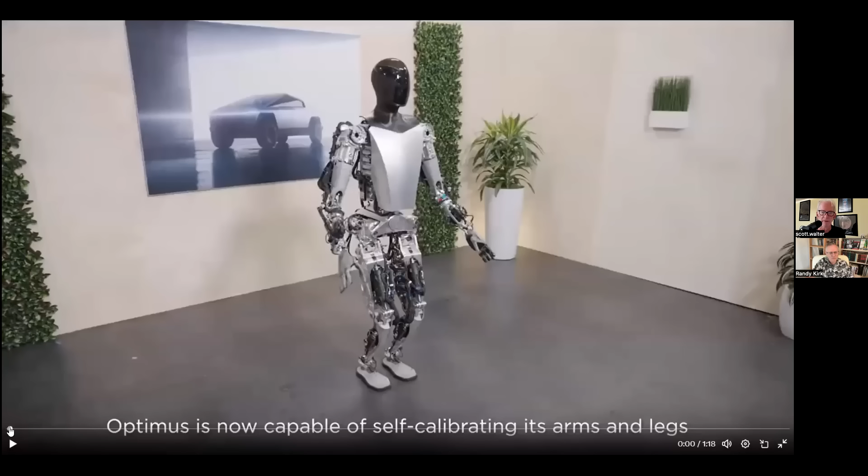Do you want to start with an overview of your thoughts, or do you want to put the video up and take a look at the details? We're going to break it down. So it seems to me there are maybe 3 really major things that are going on here.

Was there anything that stuck out to you right away that you'd like to comment on? This business that we have as humans where we can touch our nose with our eyes closed, there's a name for that. Proprioception. Yeah, okay, proprioception.

Is that what they're talking about with regard to those dots on the arms? Yes. Basically what they're doing is a calibration so that you dial in the proprioception to be accurate. You want to make sure that whatever the internal model is that Optimus has matches the control output model. So when Optimus is moving the joints...

It's said in the tweet, but not actually in here, the header to the tweet was video in, control out. So it's seeing something, and it says, now I need to move my arm somewhere. So the neural net is doing something to say that the joint angles must be a certain amount.

And joint angles are basically measured in encoder pulses, so that's why they're called encoders. So the first thing to do is make sure that all the Optimi are calibrated to the same reference datum, or the same zero.

So the thing about it, if you look at my elbow, have my elbow out straight. If I bend my elbow, I want to know what that angle is that's measured. So what you do is you put an encoder there at the joint to measure it.

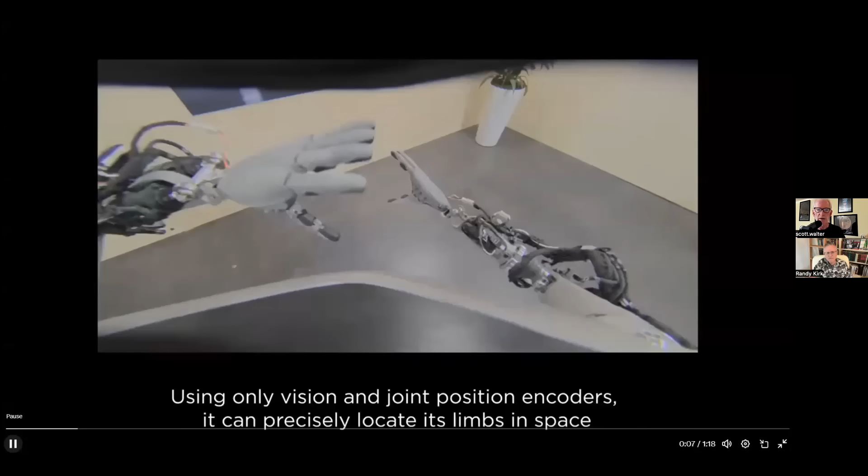They're trying to survey some landmark features on your mechanism, and cameras are really, really good at doing that now—like iPhones and everything else are already able to pick up landmark features. So what we end up seeing here is when it starts to move around, it's probably doing these specific moves intentionally to figure out some of the joint angles, and then we could see what it sees. When it's looking down there, you'll see there's no dots on there, but if you look at the hands, you're going to see creases in there—points in the knuckles, some ends over here on the wrist, and a few other places that may be really good landmark features that it can recognize and pick up.

So at some point the system goes, yeah, I see those. And remember, Optimus has multiple cameras—it's like us, it has stereo vision, but actually a bit more because it has several others. Because it has stereo vision, it's seeing both those a little bit differently in those two images, and you can match those images up and triangulate to figure out what the actual distance is. So that's a very, very common thing that will be done to measure it.

Now, there's an important step before that. First, you have to calibrate the cameras, because in order for us to figure out what the stereo field of view is, we have to know the exact distance of our eyes, how far they're apart. And so you're hoping all the Optimi are manufactured the same, but it's possible the camera is popped in not quite right.

So we do the same thing with FSD. Remember when you first get it, you have to calibrate the cameras, you have to drive around a while. So there's an auto way to do this, first you calibrate the cameras. Now that the cameras are actually seeing everything accurately, you go in there and survey where those different landmark features are. You try to oversample, because the more you get, the better it's going to be, since any one individual measurement is going to be a little bit noisy.

But when you have a lot of them, the noise basically comes out in the wash, and now you know exactly where it is and can dial it in. So it might be one of those things where every time they turn off Optimus, it's like when you wake up in the morning, bleary-eyed, your proprioception is really bad, like when you go to yawn and your hand goes like this. So it may be that when it wakes up, it goes through a very simple routine to recalibrate. This is very fundamental to robotics in general.

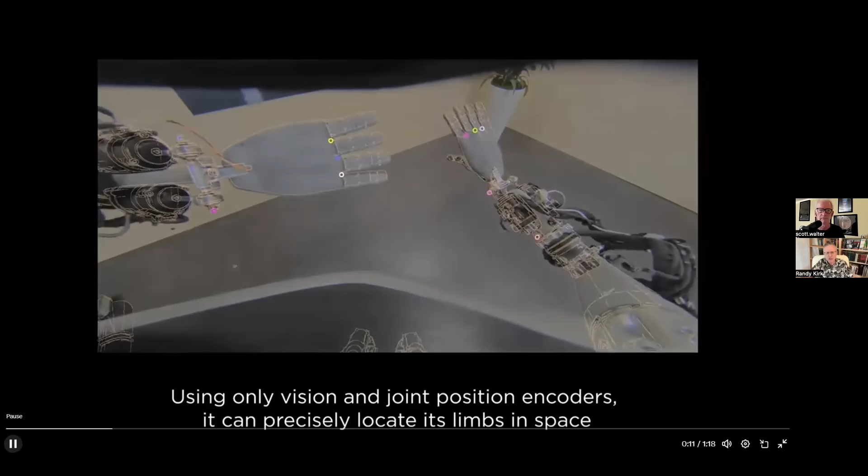Okay, now the second thing that came to mind, only after I heard you this morning on Herbert, and I'm looking at it right now, is all the wiring that still is exposed. Yes, you mentioned that on the video this morning. And so there still seems to be quite a bit.

And remember, this is still a prototype. We can actually see a lot of the covers are off and everything else, so we really don't know how many of these are needed cables versus how many are just there for debugging the whole process. I suspect eventually they're going to go there, and I'm hoping they're able to find some way to route these things. They probably are, but it's just low priority at this point.

The other thing to remember is that here it's using vision and joint position encoders, so it can precisely locate its limbs in space. It knows exactly where they are. And limbs mean legs as well, so somehow it has to look down on its legs. I'm not sure whether it does that from a standing position, or whether it sits down, or whether it's balancing on one foot, because it's going to have to get its leg out there in the field of view for that to work right.

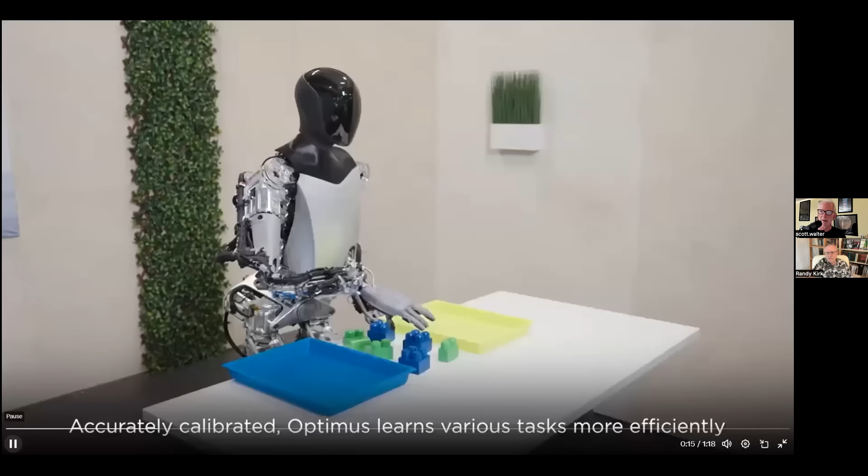Okay, so that's what we have here, I think, on that. And then we get to the next part, which is now that it knows where it is, it can actually grab the parts because it knows what it wants to get. So it's the vision in, and now whatever the control out is will match the model correctly. Otherwise, if it was way off, it would probably miss the target every single time. So now it's able to learn it, and it'll probably be easier to transfer from one Optimus to the next.

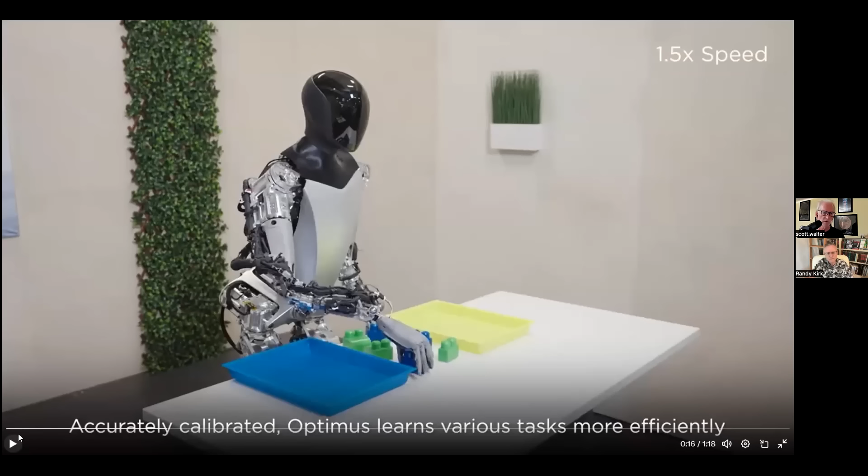And we can see it's picking up what looks like Mega Bloks or something like that, to move them into different positions. A very simple step. We saw Google doing something like this about a month or so ago, showing how they can pick up parts and move them around, like putting apples in the apple bowl and oranges in the orange bowl. This is a similar thing, they're probably giving it a very simple instruction, put the matching colors together.

And it's interesting, this looks more like yellow to me than green, but it may be that the blue belongs there, and this is kind of the best next thing. Or maybe it's colorblind, I don't know.

It's been noticed that when it grasps something, the other fingers kind of close too. It may be that from the standpoint of grasping, it doesn't quite know yet that you only need 3 fingers and can leave the others out. It's probably just closing them for good measure. But it actually looks very natural, because if you try clenching your hand and then just using the thumb and first two fingers while keeping the others out, it's kind of hard to do. The other fingers just want to come along.

Optimus can actually hold those fingers up there because they're independently driven. As you move one, it's not going to force the other finger to move. So it's just saying, go ahead and clamp it down, because maybe we're not exactly sure of the size of the object, but that's okay. That's what it's going to do for a grasp.

But also, if it's watching a human, if it's watching a video, this is video in, and the human is doing the same thing. The human is not going to have the fingers out there. Maybe you don't want that, because now the fingers are exposed and might get caught on something. So maybe the idea is to get them out of the way.

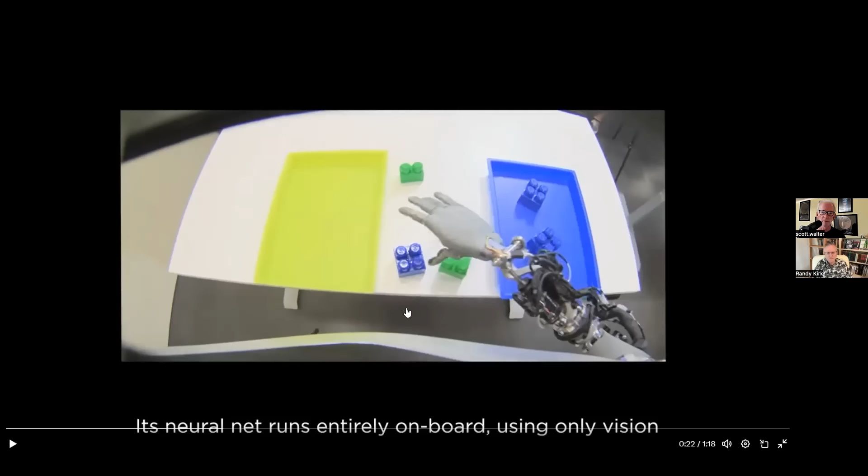And now you notice, it just sort of dropped it. I don't think in the same place, but it didn't care that it actually dropped it on the other block. It's just like, it's over there. Eventually you might want to show it to say, wait, when you put it in there, make sure you're not bumping anything else. Leave a little bit of space or something like that. That's probably going to come.

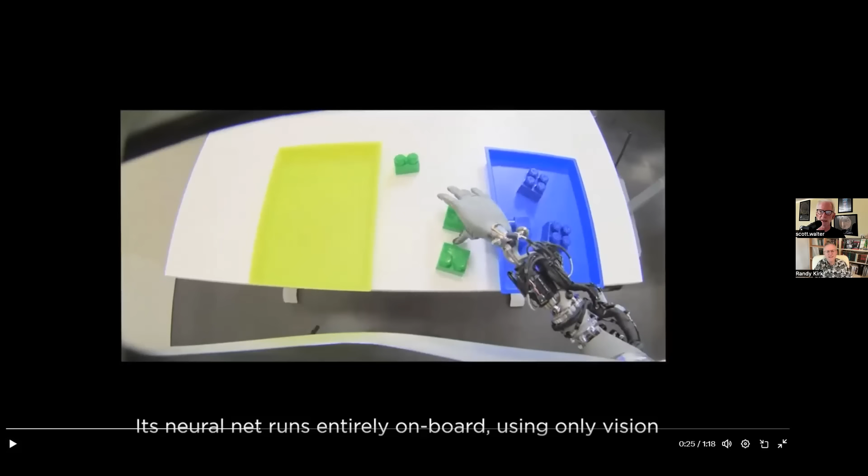Now, of course, you notice what happened there is it tipped over, right? Because of that, because of the way it dropped it. And we're going to see in a second how it kind of corrects something like that. But right now, it's just, all right, now let's pick up the greens and put them over there.

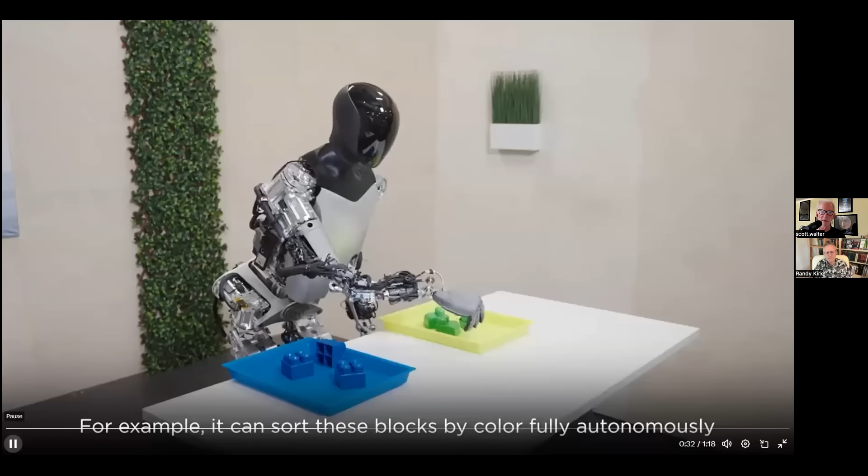Sort by color autonomously. Now, this is the dynamic reality of the world. So we have a human that's going to come over and play cat and mouse with Optimus and basically annoy him as much as he can. So let's watch this, and you'll see that it's hard to tell whether the human was making sure not to touch Optimus, or whether Optimus noticed the hand was coming in there and decided to move out of there. So this is going to be very important to seeing how Optimus interacts with other humans, right?

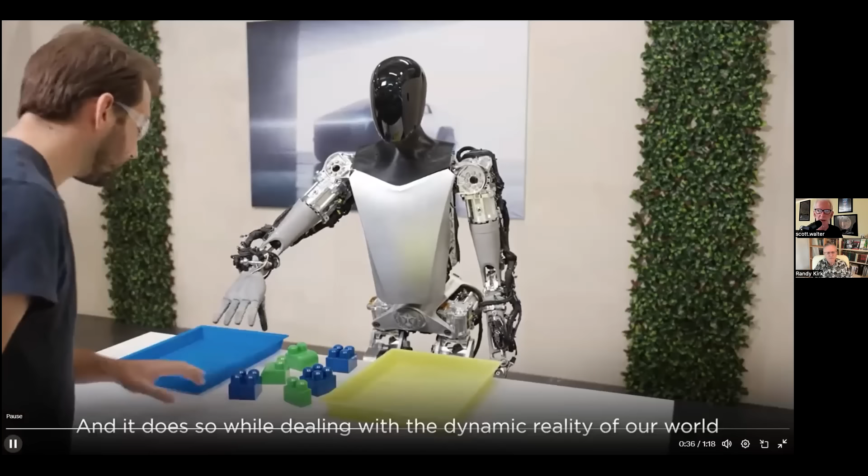Because you have the 3 laws of robotics. And the first one is that a robot will cause no harm to a human, bring no harm to humans. That's the very first one. And that basically has to be part of its firmware. It's got to be in there to understand that. So if it's doing an operation, it looks like it's going to bump into someone, it needs to kind of stop that. But at the same time, the human is the one that's being the aggressor here. But it, to kind of back off, it's not there. And there's some other little things we're going to look to see. So that's like one of the first questions I want to have.

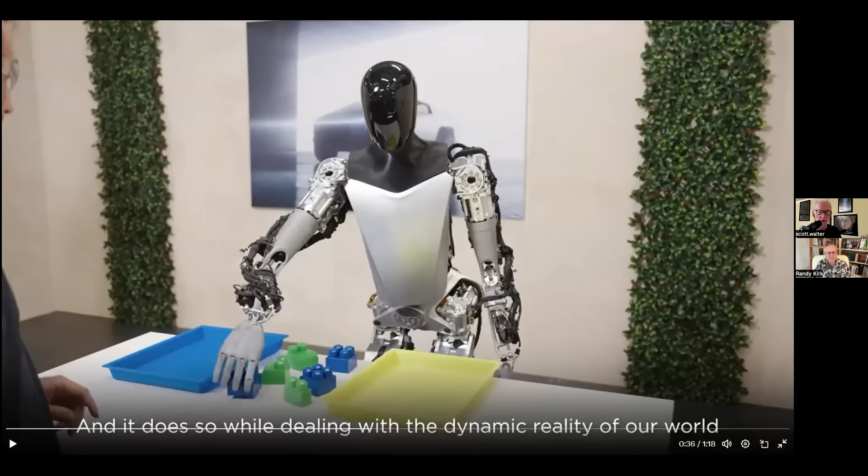Now, here, it's getting ready. I think this is where we get the target. Oh, did it move? Okay, I think what happened is he kind of hid the target. He played like a little bit of peekaboo. Let's see exactly what was going on there.

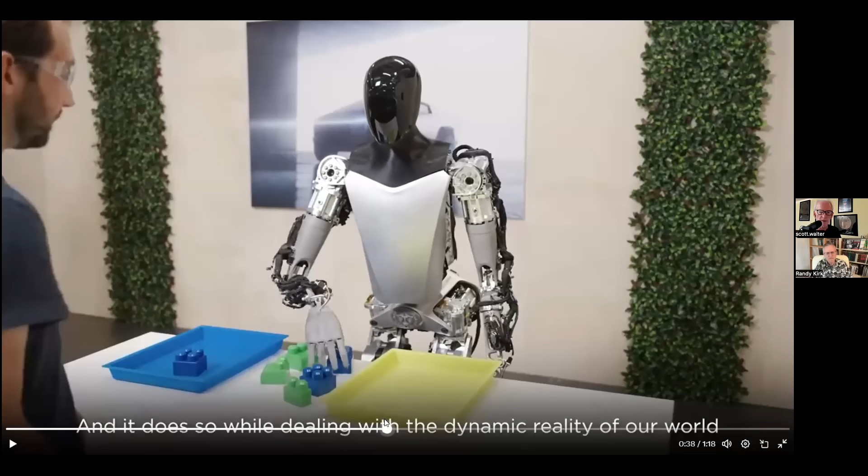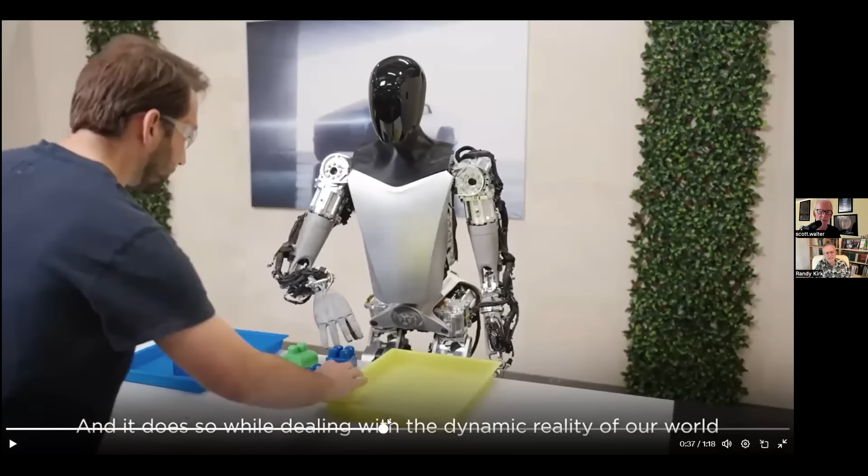So it's right here. So suddenly, I think Optimus is going for—I'm not sure exactly what that hand was all about there, what he's trying to do. He's coming around here. I'm not sure if Optimus was going for that one and went for the other one because it was kind of blocked. So now Optimus was clearly going for that blue block.

So in the first case, it may have been, I hid it on you, so suddenly it's not there anymore, so it looks like the next best one. In this case, it's like, well, I'm really going to move it because you were going for it, and you could see the motion of the Optimus hand was towards it. And now it's somewhere else, and it rapidly picked it up and moved over there. So there was like no hesitation on where to go. Again, I don't know if the human hand kind of stayed around there.

It's moving, it's comfortable to be moving around a human hand, but it doesn't want to hit it. Right, okay, that green block. Okay, it was going for the green block there, and then that was sort of bumped in there.

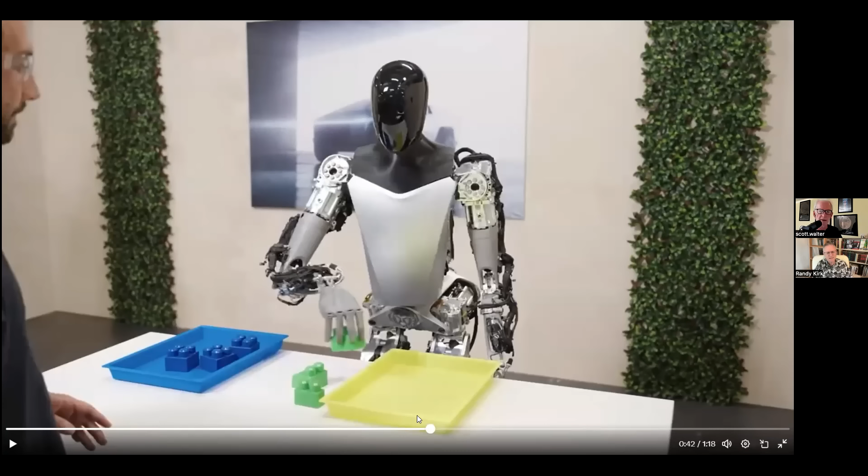Okay, so let me back that up a little second. So it's going for one of the green blocks right there, and it's like, whoa, wait a minute, I'm going to move it on you. So now it says it's not there. I have to make a decision on which one to pick up. It doesn't matter which one it picks up at this point. So it says, I guess I'll go for that one, go for the other one. So it's going around and quickly making a decision on which one it's going to be. So even though the target moves, it rapidly goes and gets that.

So one of the things I want to find out is how well it behaves around humans in situations like that, to make sure it doesn't bump in or make an accident. The other thing I'm wondering is this persistence model—this thing that when children are very small and you do peekaboo, it thinks you've disappeared or you don't exist anymore. Right, it doesn't realize you're behind it. So whether Optimus understands that when the block gets hidden under the hand, it's really still there, and whether it would just be patient and wait for the human to expose it again.

Or in this case, it just says, well, if you're going to play a game like that, I'm just going to go get this one over here because this is my task that I want to do.

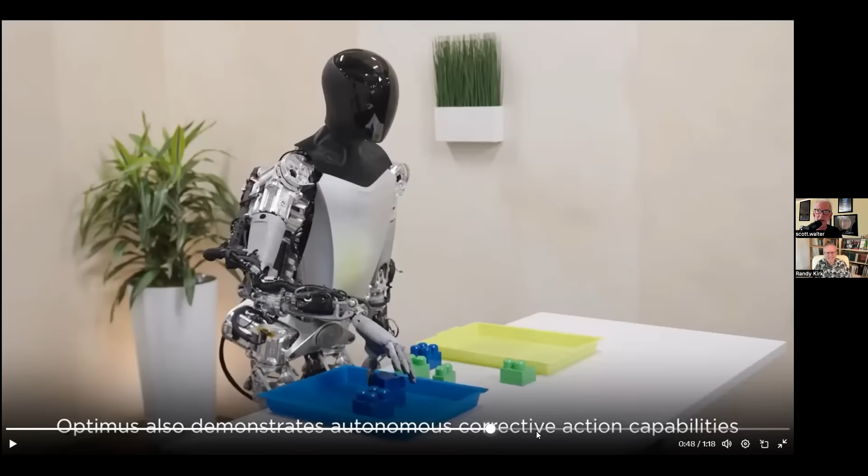Fortunately, Optimus probably doesn't have a temper. Otherwise, he might get upset after a while and push the human away and say, stop this, or knock the hand away. That's actually something I'd want to know whether that's going to happen in the future, because that would be a strict violation of the first law, right there.

Whether that's encoded in there, and whether they've thought about it - I'm sure they have. I'd just like to know where it is in the testing that they want to do. So now here we have the unsorting. It's able to pull everything out, which is rather interesting. The blocks will bump into it. So that's sort of the training in the AI thing, that it's able to do the neural net.

So there's a lot there. First of all, that there's no heuristics in there - just this idea, wow, video in, control out, is big. But then the other thing is, well, then how did you teach it in the first place? You want to know that a little bit. And it's like, well, little hints, but clearly it's doing decision making and what's going on.

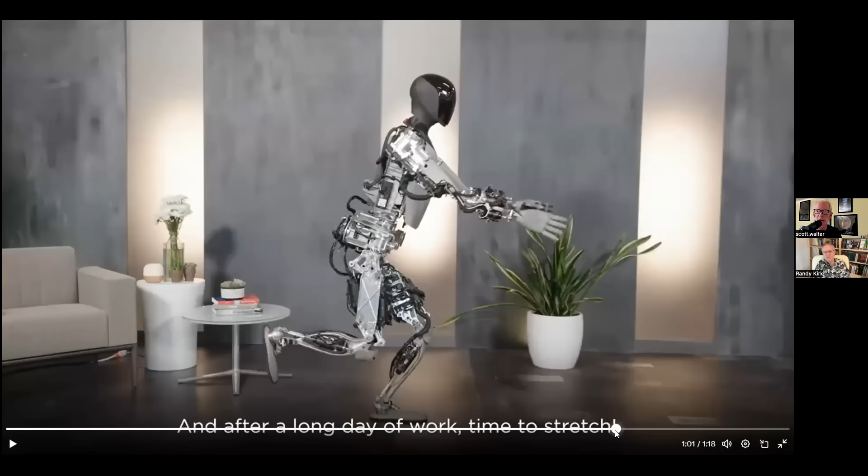So the next thing is to find out how they are really teaching, and whether they're teaching with videos, and how many videos they're going to need for it to be able to do lots and lots of complex tasks.

Now, this one here, I was expecting them to get to someday, because we know Optimus is going to walk better and better. They already showed the evolution of walking in a video a year ago, where it's first kind of plodding along very poorly, almost squatting down and getting up, and then the hips are coming out. And then it should just be getting better and better as it goes along.

And there was a hint in one of the last videos - remember the egg that didn't break? Yeah, the leg that came down to hit the egg, but it never broke the egg. That was of the leg, and that was showing the precise control they have on the leg and how rapidly they're able to move it around. So that was already a hint that there's going to be a little bit of finesse going on here, and some interesting abilities on the walking.

And this, you need the whole body to understand what's going on here. So here's a yoga stretch, proving it can balance on one foot, which is already amazing - the idea that it sort of knows you have to get the hands out and everything else to create that balance point, to be able to get that movement. And what's interesting is the whole body kind of gets out there.

And right at the end, only the leg moves. The planted leg just has a little bit of movement there to go forward. Part of it might be to get the center of gravity more over the foot, so you're not balancing on a tip. If you're trying to balance on a tip, that's very, very difficult. But because you have the flat foot, you're basically balancing anywhere along there, and there's a center of pressure on that foot. So long as that center of pressure is between your toes and your heels, you're not going to lose balance.

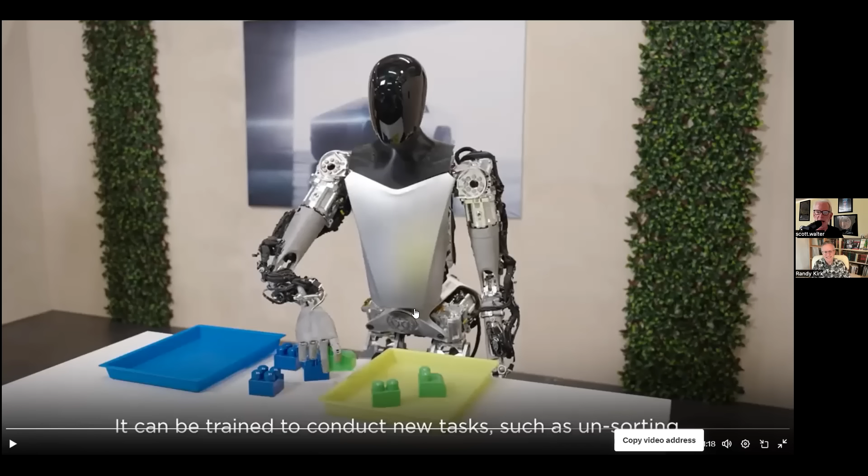That's it, it doesn't appear anywhere else in the body. But when you look at it, the mounting mechanism for it is weird. There's all kinds of holes and slots in there that seem to have no purpose, because when it mates to the other, it's connected. Wait a minute, are you missing some nuts and bolts here? What's going on? I don't think it's necessarily a point they're going to attach the harnessing to or anything else. It's a real mystery, it really pokes out, and it just looks odd. So it must be that they had another purpose in mind for that at first. And so my guess is, because it's a very weak motor, and I'm surprised it's strong enough for what

you need for the wrist. This motor up here in the shoulder, personally I think that thing's overpowered, that's too big. The first two, they definitely need that power. This one can be a little bit smaller, but maybe this one was just too wimpy, so they had to size it up. But I wouldn't be surprised if this one could actually go up here well. And now they may have made some decisions that say, well, you know, this one's a little bit underpowered.

Or it's okay if we give it a little bit more, let's bring it up here and do something different. But my thoughts are, the original Optimus also had 40 actuators in there, but it only had a 6-degree freedom arm. It didn't have 7 because they didn't have the yawing going on there. So do you remember where those other 2 actuators were? Because it's still 40, and they added one here and added one there, which means the count should be 42. But the count is 40 because they removed 2 actuators from somewhere. And do you know where they removed them?

Right up here in the head. The neck, yeah, you said the neck. Yep. So when Optimus was initially walking, the very first prototype, evidently sometimes it fell over just when it moved its head. So its balance was so bad that just moving the head, it's like, oh no. I mean, you got to be pretty clumsy if just turning your head makes you fall down.

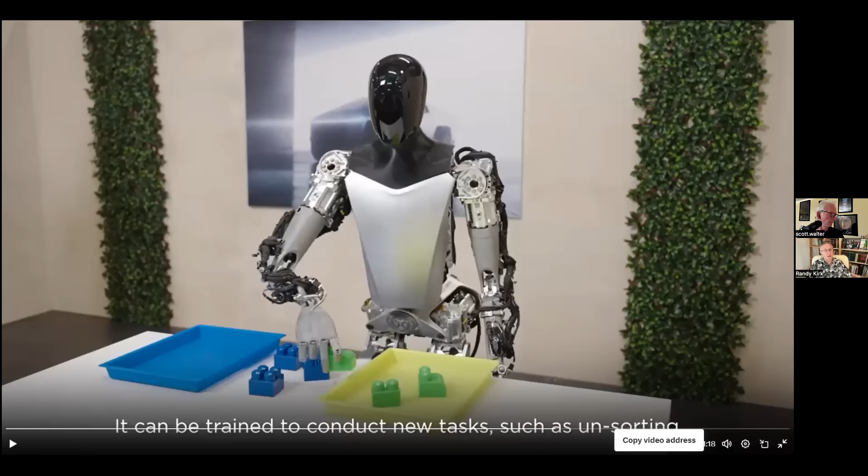So that was my main thought, actually that was my first thought, was that you want the best of the best out there if this thing is getting ready to actually go into some kind of production phase. They're talking about November, which is only 45 days. Well, 45 days till we're in November. So yeah, it's such an interesting next step here.